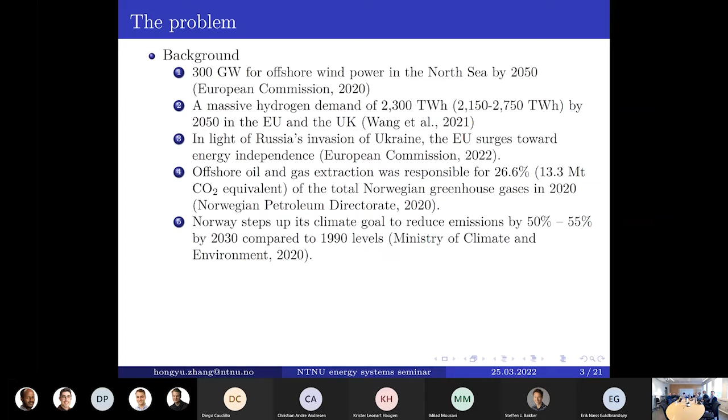As you know, the North Sea has huge offshore wind potential, and green hydrogen is expected to be a big part of the possible massive hydrogen demand by 2050. The recent Putin's invasion of Ukraine makes the EU surge toward energy independence, and renewables are given an important role in this energy transition. In addition, from a Norwegian perspective, offshore oil and gas is the most important export commodity in Norway. However, this sector has higher emissions than any other industry in Norway, so it's an important sector to be decarbonized from a Norwegian perspective.

So all this comes together and leads to the questions we try to understand. Firstly, what are the values of offshore wind, offshore grid, offshore energy hubs, and green hydrogen in the energy transition? And then how can we make investment planning under uncertainty to fully decarbonize platforms and provide global insights?

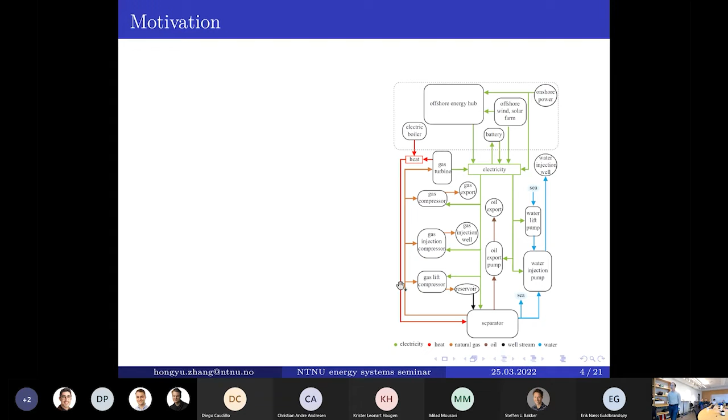And you can see we're going to start with offshore oil and gas decarbonization. The reason we want to start there is that this sector involves multi-billion-dollar investment and profits, and their decarbonization needs may likely trigger large-scale investment in offshore renewable technologies. So we want to understand what technologies exist, how we can use these technologies to decarbonize platforms, and how these invested assets can be used for energy export after the lifetimes of the offshore fields.

And so our motivation here is that eventually a mix of technologies can fully replace gas turbines and achieve zero emission production. The reason is that around 85% of the emission from the oil and gas platform is coming from the energy provision, and replacing gas turbines with emission-free technology is an effective way to decarbonize the platforms.

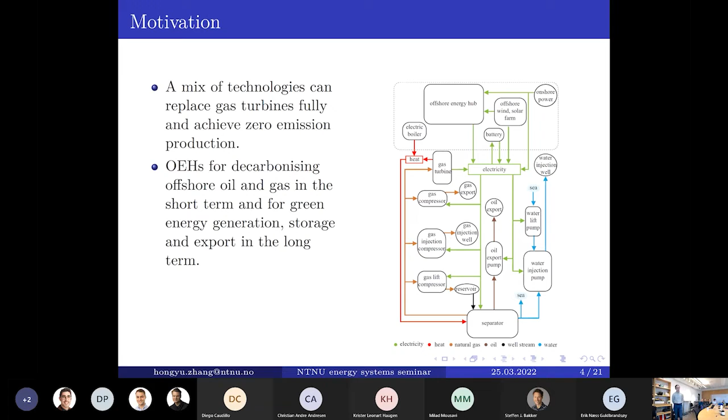Our motivation to consider an offshore energy hub is that there is a weight and space limitation on the platforms, so it may be technically infeasible to make any modification of the platforms. So an external hub to help efficiently distribute offshore wind may be a promising option. And a more major function of the offshore energy hub is to export clean energy to the onshore system for the energy transition. So these are our motivations.

Now I want to give you two more pieces of background information to follow the presentation. First is on the methodology. We are going to deal with an investment planning problem over a long planning horizon, so you will face uncertainty at both the operational level and the strategic level. To include both uncertainties in a multi-stage stochastic model will lead to a large scenario tree.

But for a model like this, with a long planning horizon, you don't actually need to plan your system operation for decades ahead. Instead, you are probably only interested in examining your investment decisions with some operational constraints. So that is why we go for a multi-horizon modeling approach.

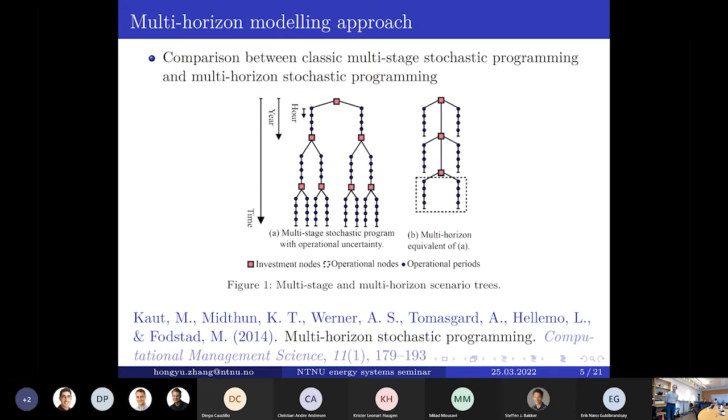Secondly, I want to talk about the offshore energy hub. An offshore energy hub is a unit where multiple energy carriers can be converted, conditioned, and stored. Different energy hubs will have quite different configurations. In our study, we consider a hub that can take offshore wind power, convert this wind power to hydrogen, and store the hydrogen in some form, either a tank or an underground formation. Then this hydrogen can be reconverted to electricity via fuel cells.

So here I want to point out that, strictly speaking, an energy hub should have the function of storage. Otherwise, this hub is more of a power distribution and power generation hub.

However, in the context of an offshore energy system, a lot of literature considers this offshore energy hub without considering storage. So strictly speaking, this thing shouldn't be called an energy hub, but rather a power generation distribution hub. But in our study, we consider all three functions.

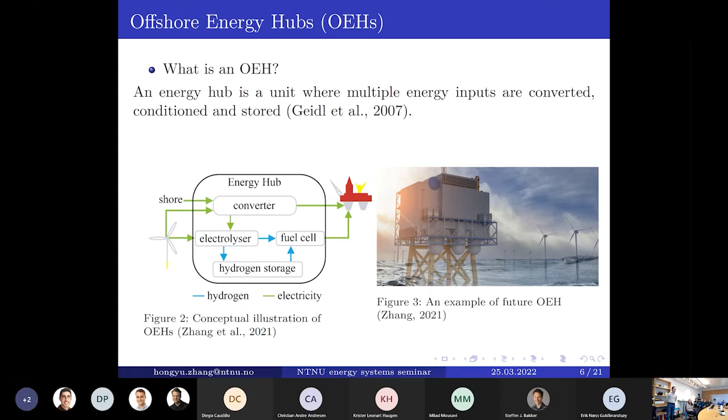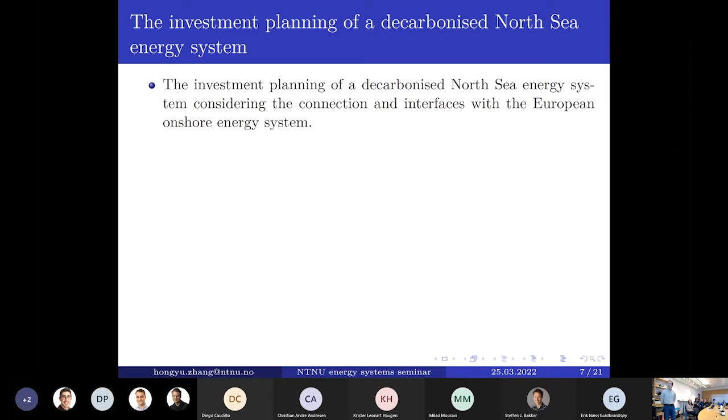And now I want to talk about the specific problem we try to model and solve. So the problem is an investment planning problem of the decarbonized North Sea offshore energy system, considering the connection and interfaces with the European onshore energy system. And we consider the investments in a bunch of technologies, including offshore renewable energies, offshore energy hubs with electrolyzers, hydrogen storage, and fuel cells, and converters, and subsea cables, and electric boilers, which is important for replacing gas turbines.

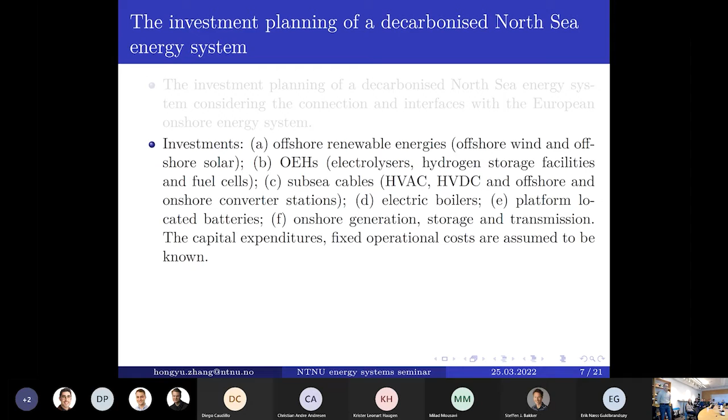And then we consider also platform-located batteries, which may be infeasible for many platforms due to the weight and space limitation again. And also we consider the power system expansion on the onshore system, including the generation, storage, and transmission. And the model is going to decide what are the optimal capacities of the technologies, and what are the optimal operational strategies based on your investment decisions. And the objective is to minimize the overall costs.

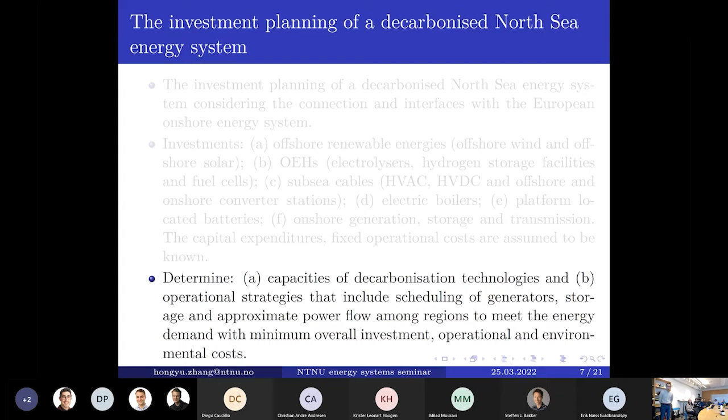And now I want to give you an idea of the scale of the study and the strategies we use to keep the problem a reasonable size. So as you can see, we are going to consider the entire European energy system. However, this will potentially lead to a very large model, and that is why we use some aggregation method to represent the geographical structure of the system.

And in addition to geographical representation, we also need to think about the temporal representation of the system, because the planning problem can span over a long time horizon. So if you examine your investment decisions over all the operational hours in a year, it will lead to a very large problem. That is why we selected some time intervals from that year and scaled them up to represent the full operational year. So you can still capture the system operation in different time intervals without really running your models over all hours.

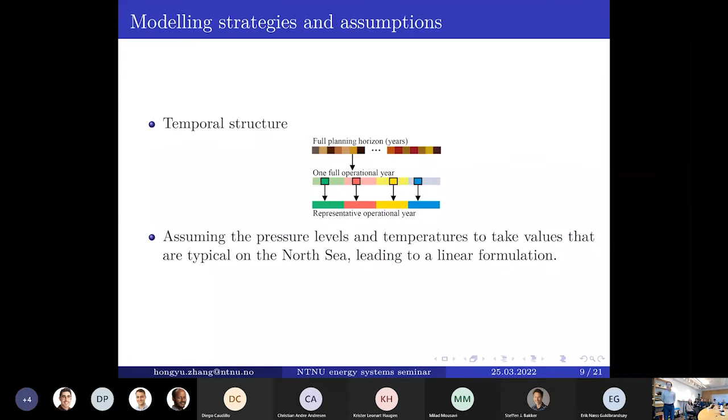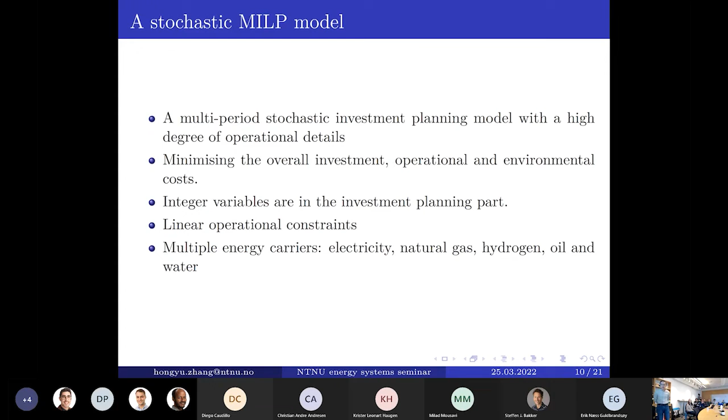And now I want to talk about the model we developed for this problem. So it's a multi-period stochastic MILP model with a high degree of operational details. And the objective is to minimize the overall costs. And we have integer variables in the investment planning part, which is important because you're going to capture the economies of scale of your investment. If you only have a linear cost model, you cannot capture the fixed part of the investment. And then all the operational constraints are linear, and we have multiple energy carriers in the model.

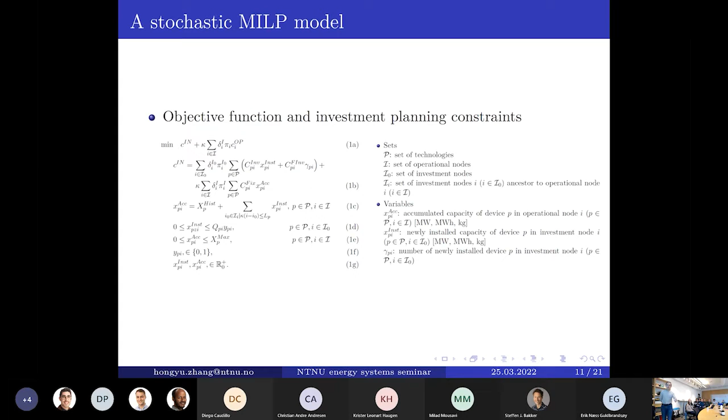And we'll just very quickly go through the mathematical formulations. So as you can see, the objective is to minimize the overall investment and operational cost. And equation 1b calculates the investment related cost. And equation 1c makes sure that the available capacity at one operational node equals the historical capacity plus the investment you made in its previous investment nodes, excluding the ones that are retired. And you have some maximum capacity constraints, 1d and 1e.

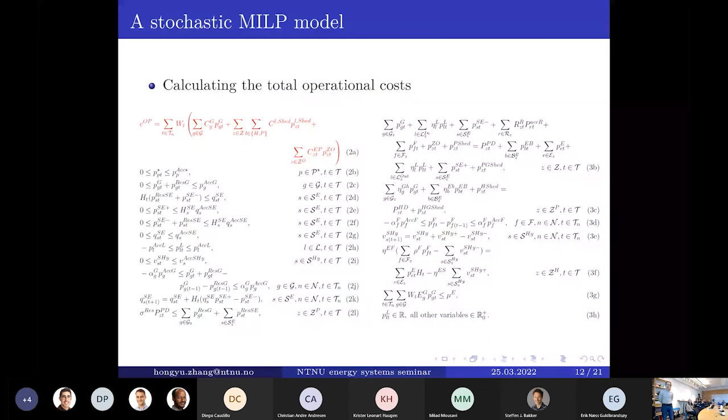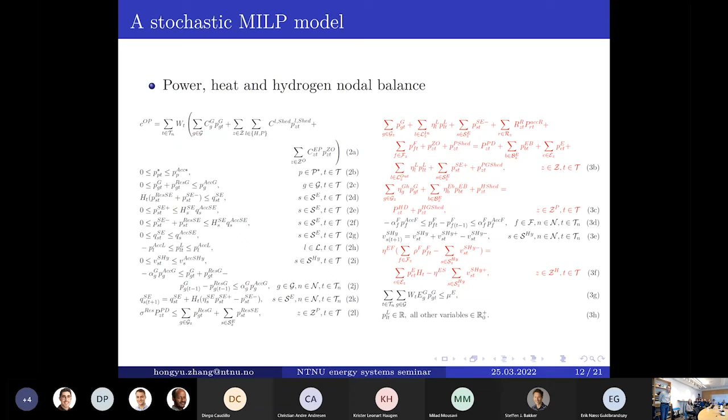And now I want to go through very quickly the operational constraints. So again, constraint 2a calculates the operational costs. We have a bunch of capacity limits, and then you have ramping limits of thermal generators, and then you have reserve requirements, and also the power balance, heat balance, and hydrogen energy balance. And we have the storage balance of storage facilities and the CO2 budget. So the investment is driven by the CO2 budget and CO2 cost.

And using this model, we conducted sensitivity analysis on 3 parameters, including CO2 tax, CO2 budget, and the capacity of power from shore. And for the sake of time, I will only go through the results of sensitivity analysis of CO2 tax. So to do this, we increased the CO2 tax from the current level, around 55 euro per ton, to 500 euro per ton, with a step size of 5 euro per ton.

And as you can see from this plot here, even if you increase CO2 tax to 500 euro per ton, you still have around 250,000 ton emissions in your system. So I think my insight from here is that CO2 tax alone may not be enough to motivate a zero emission system. And then if you compare the 2 lines, the red line and blue line, you can see that a system with offshore energy hubs can potentially reduce up to 50% more CO2 emissions and 5% total cost.

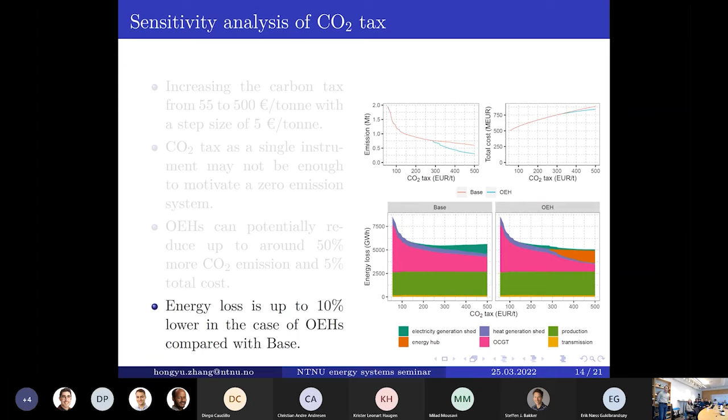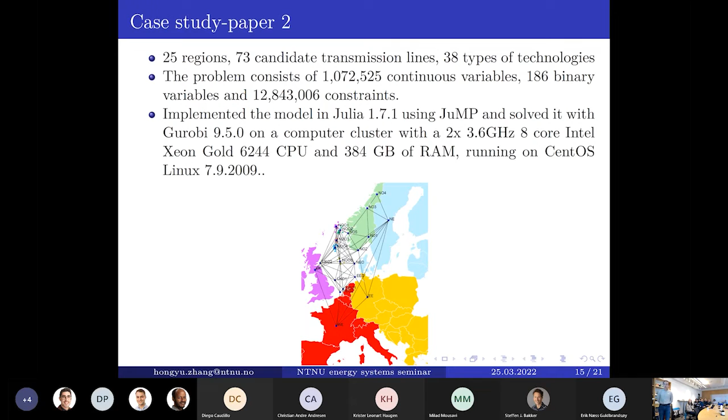Then we expand our understanding of the system to include the entire European energy system. So as you can see, we still keep a very detailed modeling of the offshore system. We have several potential locations for offshore energy hubs, and we use this model to analyze the potential values of offshore energy hubs in the European energy transition.

Yeah, please. Oh, yeah. Okay. So I will be real quick here.

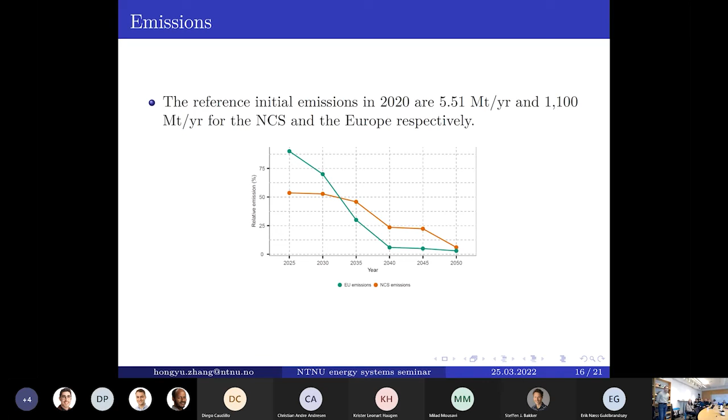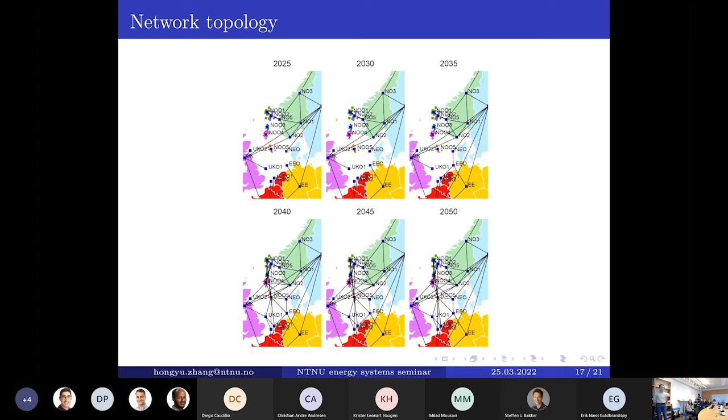And now I want to show you this network topology here. I think one insight from this result is that the offshore grid seems to be very important in this energy transition; especially 2040 seems to be a turning point where a lot of offshore locations are being connected. I will skip this slide here.

So the main conclusions from these 2 papers are that offshore energy hubs may have value in emission reductions, energy losses, and costs. And a hard carbon cap may be necessary to enable a zero emission system. And then I think offshore grid design may be very crucial for this energy transition.